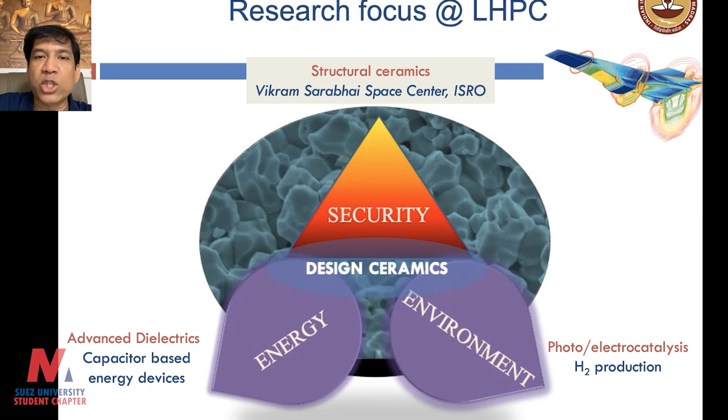The interesting part is that we produce materials in-house and design them from the atomistic scale up to microstructural and macro scale to fine-tune material properties. We use a polymer precursor route for making ceramic materials. It's not very much metallurgy — it's a lot of materials chemistry, but it's very important to have good control on materials chemistry, since producing ceramics through the polymeric precursor route involves a lot of chemistry.

We actually synthesize these polymeric precursors individually and design what kind of ceramics we want at the atomistic scale in the lab. Unlike usual ceramic processing, where you deal with powders, using polymeric precursors and transforming them into ceramics gives us flexibility to cast them and make composites. If you want to make large-scale ceramic matrix composites for space or defense applications, the only way is through the precursor route.

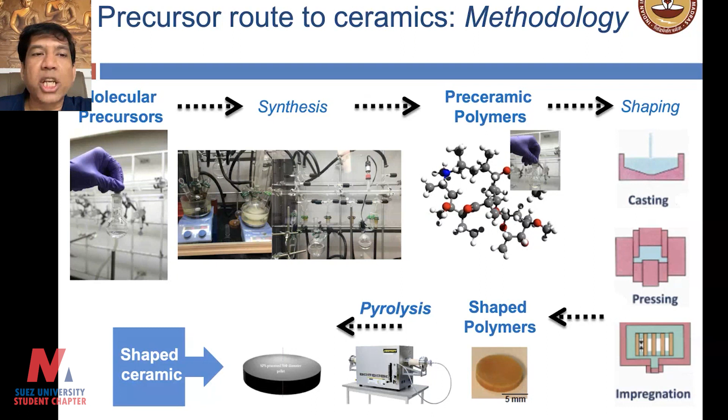When dealing with pre-ceramic polymers, we work with temperatures from room temperature to 400-450 degrees Celsius until we cross-link them. Then, if you want to shape them, you do so in this temperature range. Next, we convert the polymer—depending on its chemistry, the temperature can vary between 600 to 1200 degrees Celsius—into ceramic materials. I hope you're able to see the slides. Then we can produce very stable crystalline ceramics at 1400 to 1600 degrees Celsius.

This is widely interdisciplinary research. The most important thing is that it's a powder-free process, unlike the usual sintering methodologies used by ceramic scientists—completely powder-free. As I said, it involves a lot of materials chemistry, and at the same time it's highly interdisciplinary. To work on this, one should have good control on chemistry.

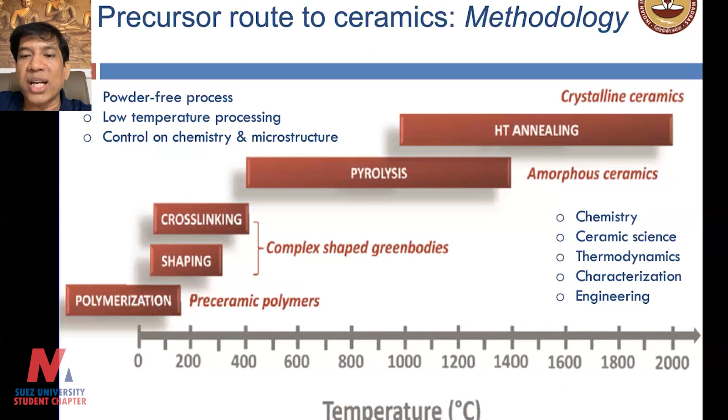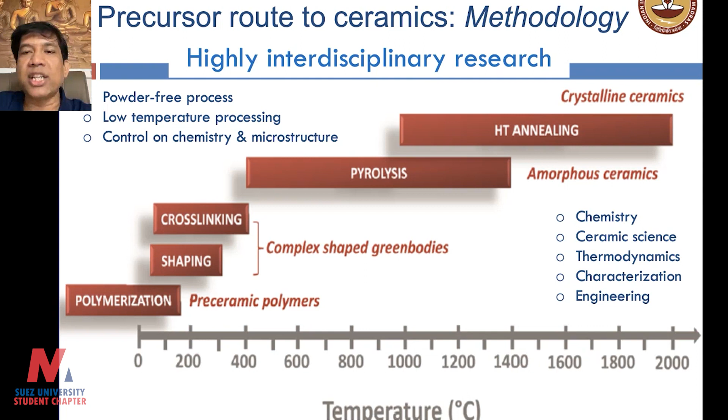You should know ceramic science, you should know thermodynamics, and you should also be an engineer because you need to develop products. This is a very highly interdisciplinary research, not so easy to do in a metallurgy department, because not everybody there is good in chemistry. So in my lab, I hire chemists, engineers, and material scientists to achieve this.

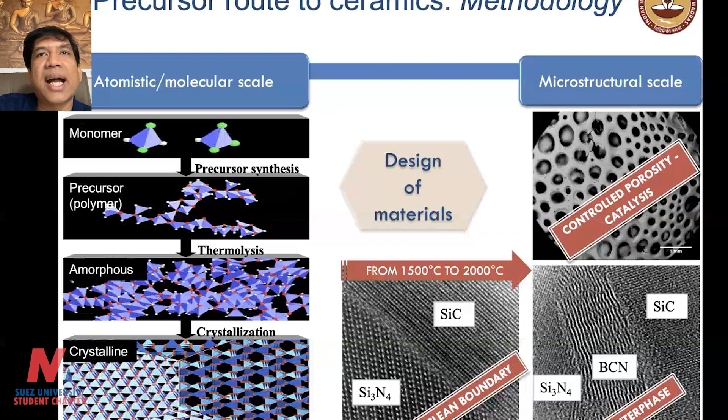For example, SiC means silicon carbide, Si3N4 is silicon nitride. They are already very high temperature resistant beyond 1200 degrees Celsius, but our objective was to work on them to make them stable till 2000 degrees Celsius. This is the work we were doing at the Max Planck Institute in Stuttgart a few years back when I did my PhD there, and we continue to work on this topic because it's extremely important for us, for the country.

There are two important challenges in this area which actually limit our capability in defense and space. One is to make ceramic fibers. Not many people can make ceramic fibers. However, this methodology is known very well - it was published in 1975 by the Japanese scientist Yajima. People know how to make them, and scientific papers are there, but there are a lot of technological challenges, and therefore not many people can make such ceramic fibers.

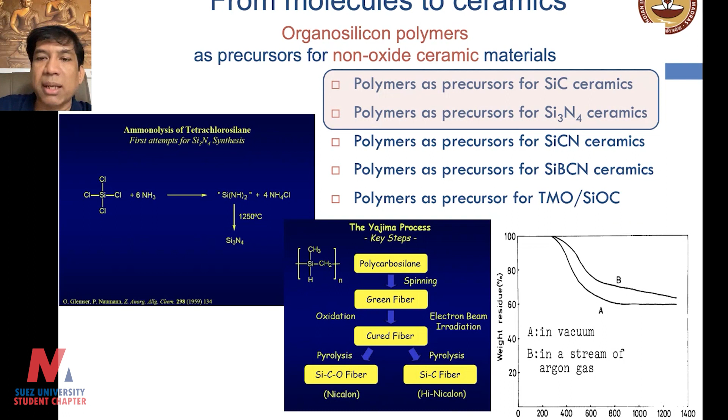For example, to make silicon carbide fiber, you need to produce polycarbosilane precursor, and you should know how to spin it and convert it into silicon carbide fiber. If you're not from the field, the silicon carbide fiber is important as reinforcement in silicon carbide matrices if you want to produce CMCs based on SiC/SiC, which many countries are not able to make as of now because silicon carbide fiber is not available and not many people can make them. As I said, the papers are there, but not many people know how to make it.

Just to give you an idea, if you want to purchase polycarbosilane from the United States, there's a company called Starfire Systems, and they charge like $3,120 per kg to purchase them. There are only a few companies which can make them - for example, Nippon Carbon in Japan, Ube Industries in Japan, Dow Corning in USA, and again COI in USA, and BJS Ceramics in Germany. Only 5 companies can make these kinds of fibers, because they're all patented and technologically very challenging.

If you really want to look at the costs involved to purchase 1 kg of silicon carbide fiber, depending on the quality, it can vary from $2,000 to $12,000. If you really want to buy silicon carbide fibers which can be used for strategic applications in space and defense, it's extremely expensive, like $12,000 per kg.

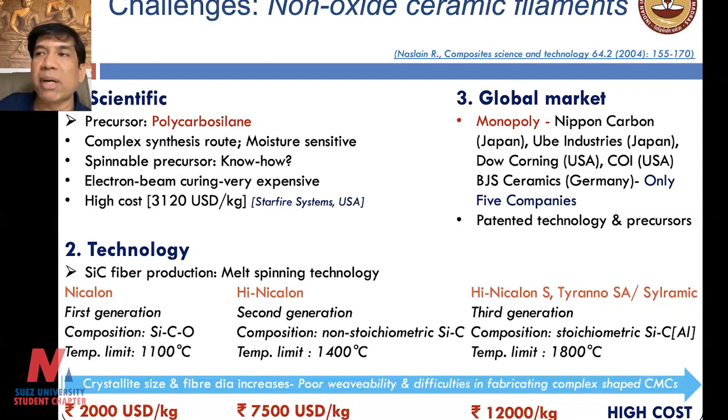But the problem is, even if you have money, I don't think you can get it, because most of them are under embargo. You cannot really get them even if you want to buy them. For example, India cannot purchase them either from Japan or America. So obviously it means that we have to produce them and we have to make them.

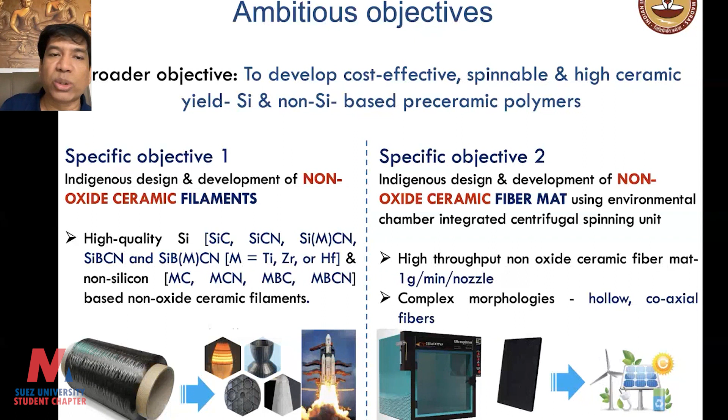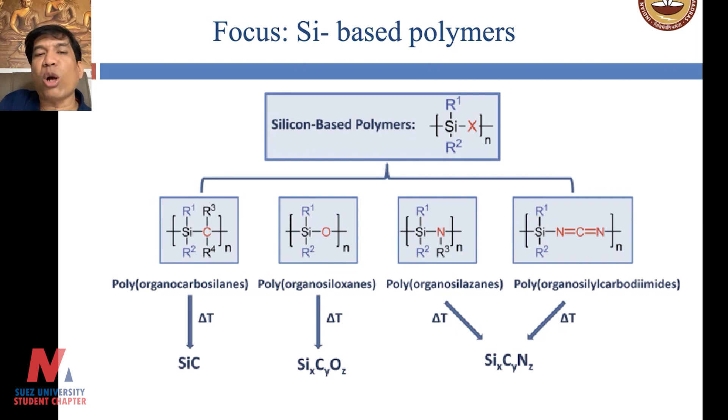Just to give you the chemistry part - I don't know how many of you understand the materials chemistry part - but we have been working on silicon-based precursors, and depending on what goes into the backbone, you can actually make different kinds of materials. For example, if silicon and carbon are in the backbone, you are making silicon carbide. If silicon and nitrogen are in the backbone, then you make silicon carbonitride. If oxygen is in the backbone, then you make silicon oxycarbide. So it gives you a lot of flexibility if you're a very good materials chemist, in making different materials.

For example, we have worked on boron-modified silicon carbonitrides, and these boron-modified silicon carbonitrides are very stable till 2000 degrees Celsius, very ideal for extremely high temperature applications. We have done thermodynamic calculations.

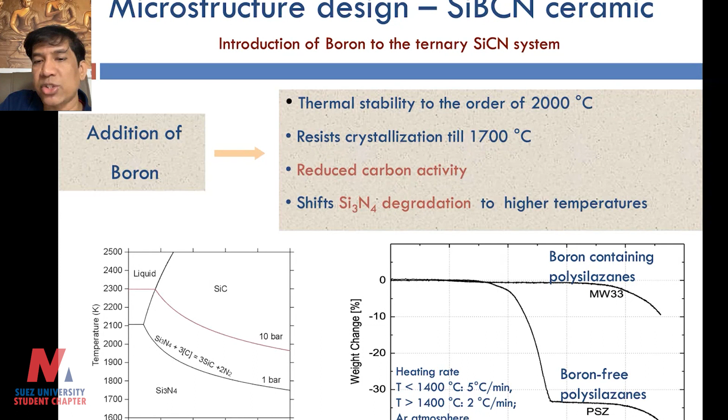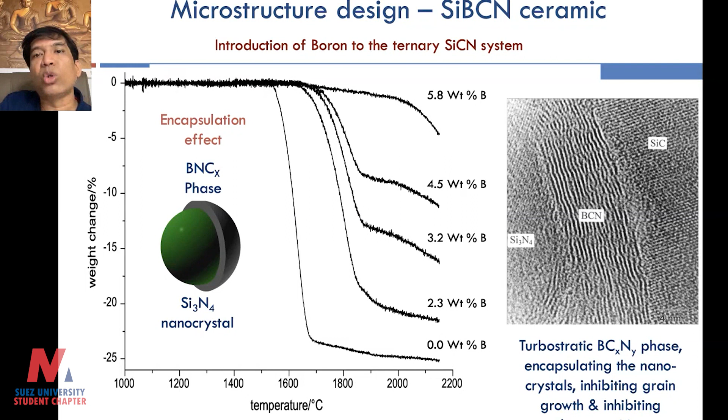We have shown that these materials are extremely stable up to 2000 degrees Celsius. This was work done in collaboration with Germany, where we produced them when I was there, and we have continued to work on them since. These materials are very useful for strategic applications. There are challenges in making these precursors, and one has to take care how to engineer the microstructures to make them extremely stable at 2000 degrees Celsius.

The Indian space program was initiated sometime in the mid-1970s, for our elaborate space program, where we build both space launch vehicles and spacecraft. I think ceramic matrix composites are very much useful for the rocket industry.

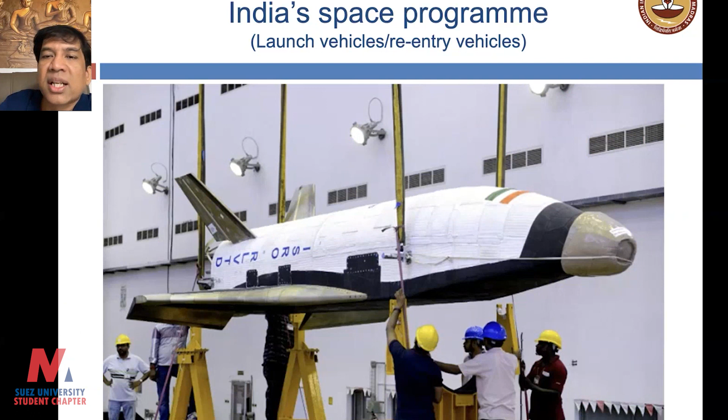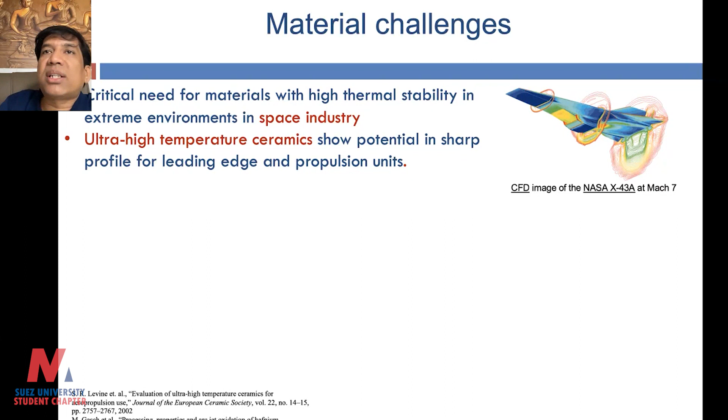This is a reusable launch vehicle that the Indian Space Research Organization is producing and has already tested. For fully reusable rockets, apart from making ceramic matrix composites, we also require ultra high temperature ceramic coatings which can withstand 2000 degrees Celsius, particularly for hypersonic applications. You need to coat very high temperature resistant materials. For coatings, it's again a big challenge.

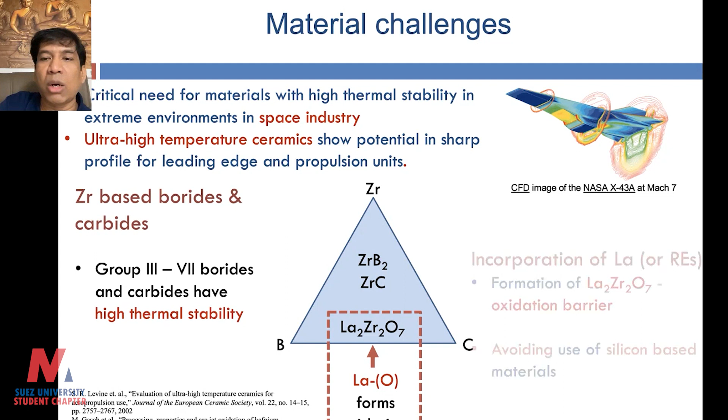So we have been working on non-silicon based materials, as you see here, rare earth based ceramics. The whole challenge is that we don't use ceramics directly. Instead, we make polymeric precursors where, in the backbone of the polymer, we have all the elements required to produce high temperature ceramics like zirconium boride or zirconium carbide. In this specific case, I'm showing borides and carbides of zirconium, but we can also extend it to hafnium carbide, hafnium boride, tantalum carbide, tantalum boride, and so on, all of which have high temperature stability beyond 2500 degrees Celsius.

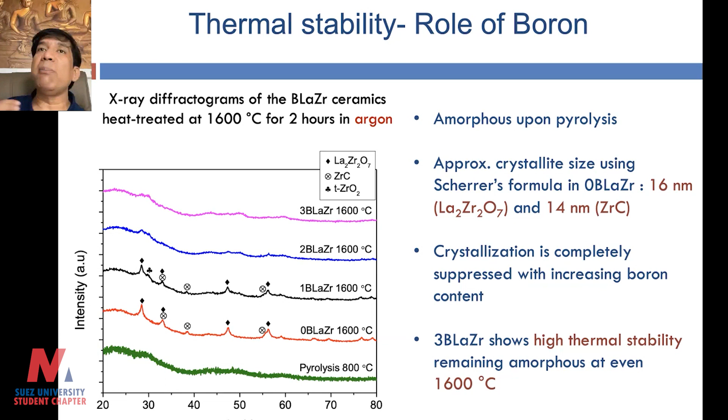We have been working on this for quite some time, for nearly two years, and have done some basic studies. As you can see from the X-ray diffractograms, the first thing we test is their high temperature capability. At 1600 degrees Celsius, the ceramic is completely amorphous, which is good for us, because amorphous materials are more stable. Although thermodynamically not very stable, we make these metastable phases as stable as possible so they can be used for extended durations of time.

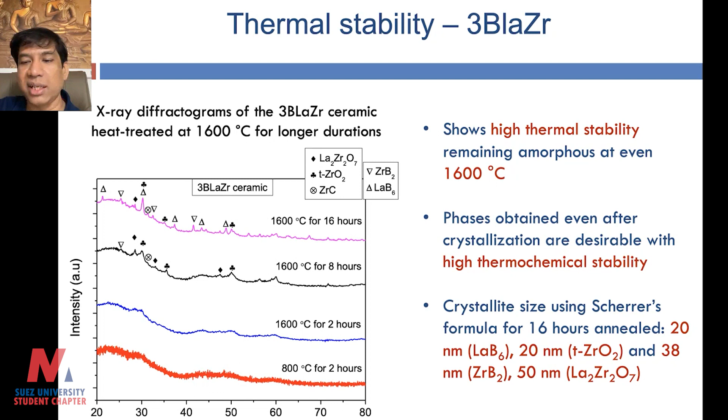For example, here it is shown to exhibit extremely small, fine nanocrystals of lanthanum-based zirconate or zirconium carbide when exposed to 1600 degrees Celsius for about 16 hours. This is what we want, materials which can be very stable. Of course, we could have tested beyond 1600, but we had difficulties going beyond that, because operating furnaces beyond 1800 degrees is also a challenge, so we are restricting our studies to 1600 for now.

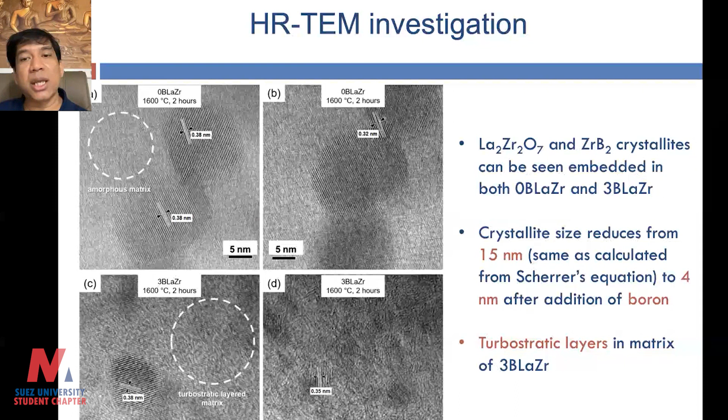So it's a very challenging problem where you want these materials to be stable at very high temperatures, and at the same time, you want them to work for a long time, otherwise the mission will be a failure. Ceramics are always not so easy, and when looking at rocket programs and launch vehicle programs, it's an extremely expensive endeavor, and any failure in the material is very disastrous. So one has to be very careful about that.

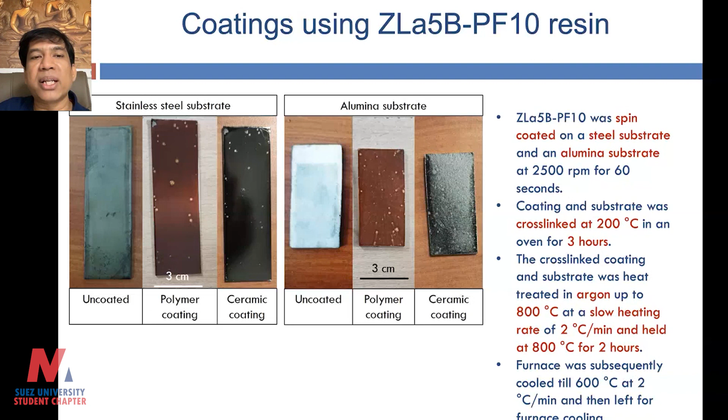We have done some preliminary experiments on making these coatings. You can see an uncoated steel substrate and uncoated alumina, and then we have coated them with polymer and converted it into ceramic, and tested it. I'll just show you a video, it will be nice to see and get an idea.

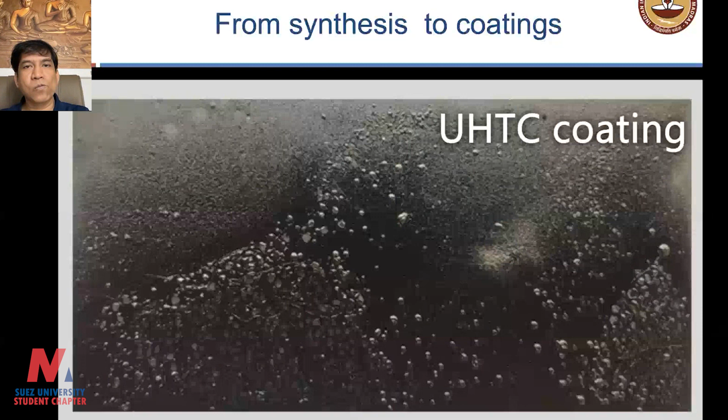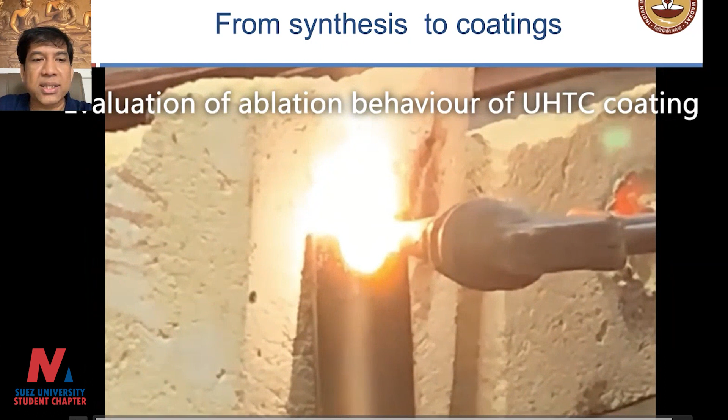This was basically to show you how we can make such coatings from precursor stage to making coatings on steel, metal substrates, as well as ceramic substrates. In order to make them, to be self-reliant and not dependent on any foreign companies, we had to start our own company.

We started a company called Ceratattva Innotech Limited, so that we can be completely independent and make our own precursors. We started this company very recently, just 6 months old, where one of my postdoctoral researchers who had a doctoral degree from Indian Space Research Organization, and his wife, who also had a doctorate from ISRO, came together, along with Raghunath Sharma, a PhD student working with me, and we all joined together and started this company.

You will appreciate that these are new materials, and we need to know their thermodynamic stability. We wanted Professor Hari Kumar on board, because he is an expert in thermodynamic calculations. He uses the calculation of phase diagram tool, CALPHAD, which helps us establish phase stability of these materials, and therefore he was part of this company.

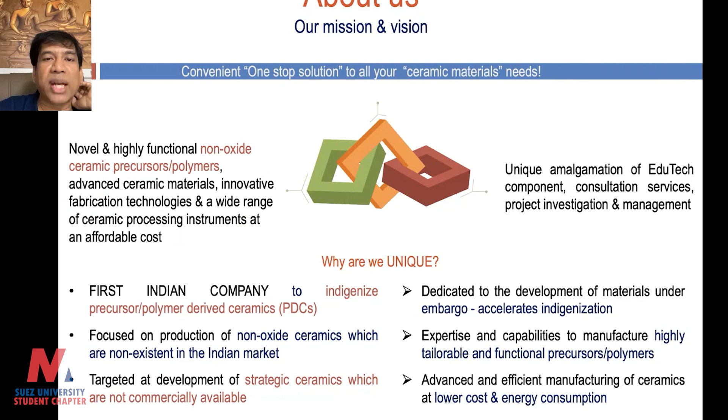Now we are the first company in India which can make such polymeric precursors, which can be used to make ceramic materials for strategic applications. Right now we are interested in catering these materials only to the Indian market, because at this point we do not know whether we will have permission to sell outside this country. But at this moment, we are catering it to the Indian market, particularly to the space and defense industry. Just to give you an idea, this is how the precursors would look like.

If it's a non-oxide precursor, we have to be very careful. They are oxygen sensitive, and you have to make sure they don't get contaminated with oxygen. This is a small piece of boron carbide material that we have developed in the lab for armor applications.

You know that steel armor is very heavy; it's not really the best thing to have steel armors. The defense sector, particularly battle tanks as well as human shields and armors, requires very light and at the same time impact-resistant materials. Boron carbide is an extremely good material which has been tested and proved to be good for such armor applications.

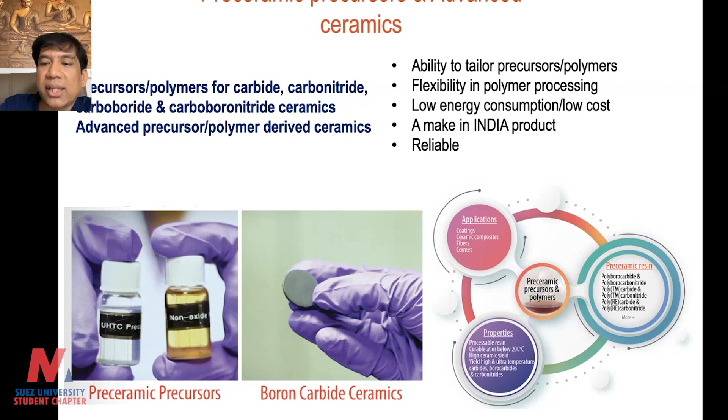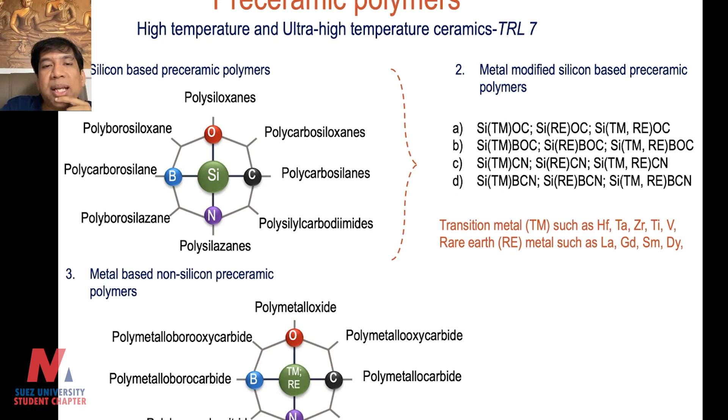This again gives you an idea of different kinds of polymeric precursors that we can produce in the lab. Many of these things are not commercially available in any part of the world, and that gives us a lot of advantage, because we can make these materials and whatever materials we want to make, we are now completely independent. That gives us a lot of advantage in not depending on anybody as far as material development is concerned, simply because they're not commercially available, or they will be under embargo, and India cannot acquire them either from Japan, Europe, or the United States.

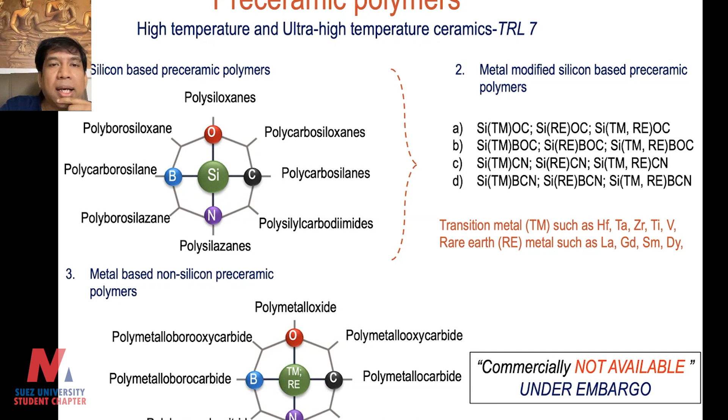So this is what we are right now. In recent times, we have also made our own small ceramic fiber spinning machine for short fibers, and this is one of the first products we have developed, which we have already started to sell. This works on the centrifugal fiber spinning technique, and it challenges the electrospinning technique.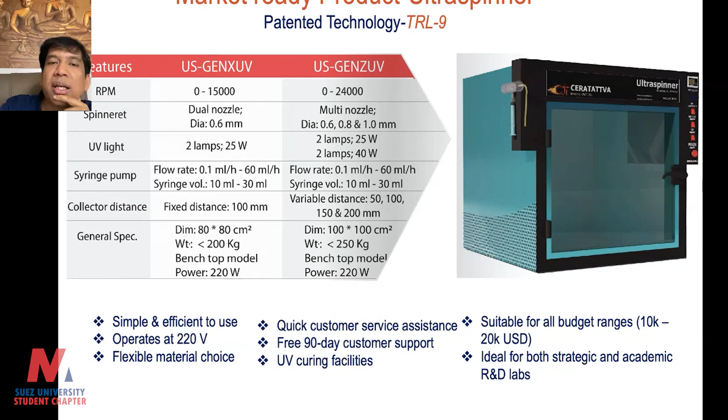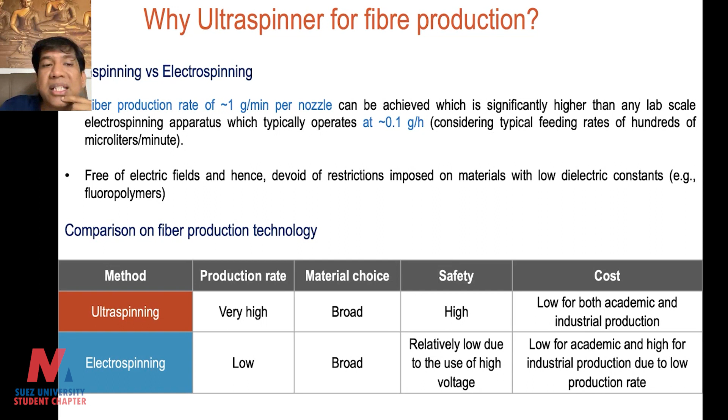I think many of you might have heard of electrospinning technique for making ceramic fibers. But the advantage of centrifugal fiber spinning is that it's extremely fast; you can make a lot of fibers. For example, the production rate is 1 gram per minute per nozzle, compared to electrospinning, which is 0.1 gram per hour. This gives us a lot of advantage in industrialization of ceramic fiber technology.

For example, ceramic—I just want to show you a video.

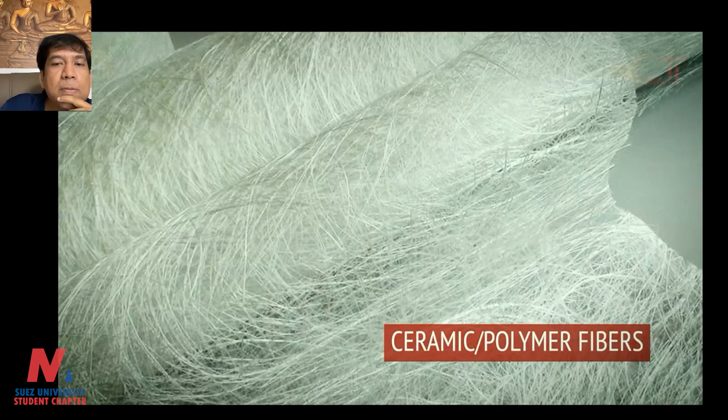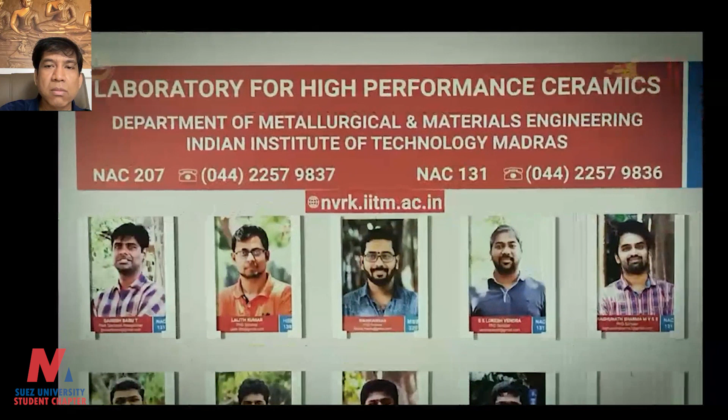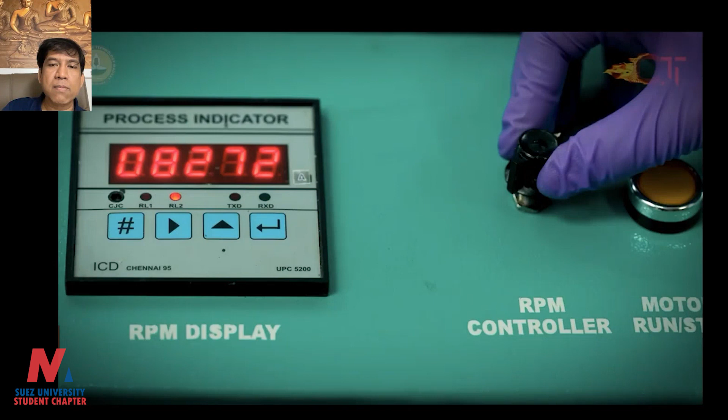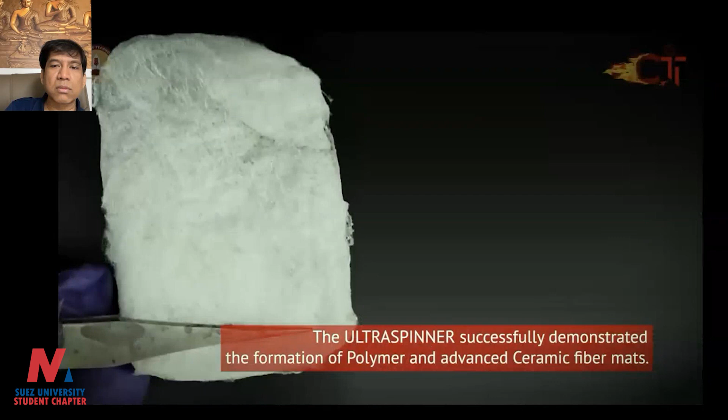Ceramic and polymer fibers form the core of key strategic applications in aerospace, defense, energy, electronics, filters, and textile sectors. The face mask, an essential accessory today, is made with polymer and ceramic nanofibers. Current manufacturing techniques are loaded with disadvantages such as limited material choices, unsafe operating conditions, and poor throughput. IIT Madras, an institute of eminence where innovation meets technology, has now incubated a first-of-its-kind ceramic materials-based startup, Ceratattva Innotech Private Limited, originating from the Laboratory for High-Performance Ceramics in the Department of Metallurgical and Material Engineering. Ceratattva brings into the market a centrifugal spinning unit, the first-generation Ultraspinner with a TRL of 9, that wipes off all problems in existing traditional fiber spinning technologies. Meet the Ultraspinner, India's first commercially available centrifugal spinning unit: 1,000 times higher output than any other technology, user-friendly and high-voltage-free, safe operating conditions, integrated UV curing of fiber mats, clog-free operation, easily tailorable fiber diameter and morphology, producing both polymer and ceramic fiber mats in a matter of minutes. The Ultraspinner also handles advanced functional ceramic oxide fibers and polymer-derived ceramics. The versatile and future-centric design enables extension to other materials too.

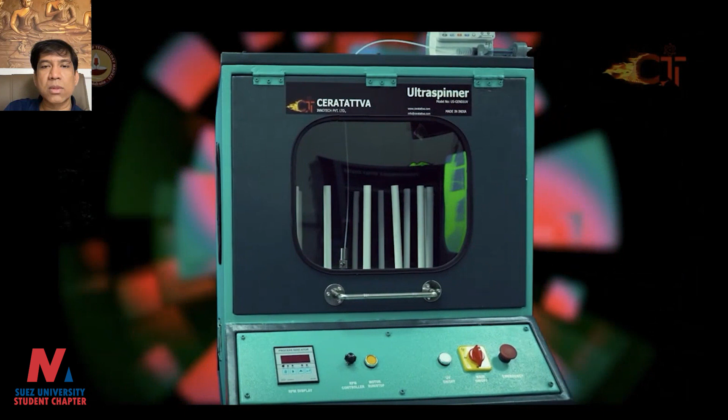The Ultraspinner, the game changer from an IIT Madras research stable, is ready to disrupt the industry of polymer and ceramic fiber manufacturing. With its unique amalgamation of safety and high throughput, it is ideal for both industry and academia alike.

So which means now we can actually make both polymer fibers, fiber mats, including ceramic oxide and non-oxide ceramic fiber mats, and we are now in a commercialized state. So we are already selling it within the country, making them.

Now the biggest challenge is still to make long ceramic fiber filaments, which I initially talked about, like making very long silicon carbide filaments. That is still a big challenge. We have developed a small prototype towards it, and hopefully we succeed, because that's a very important thing for us towards strategic self-reliance.

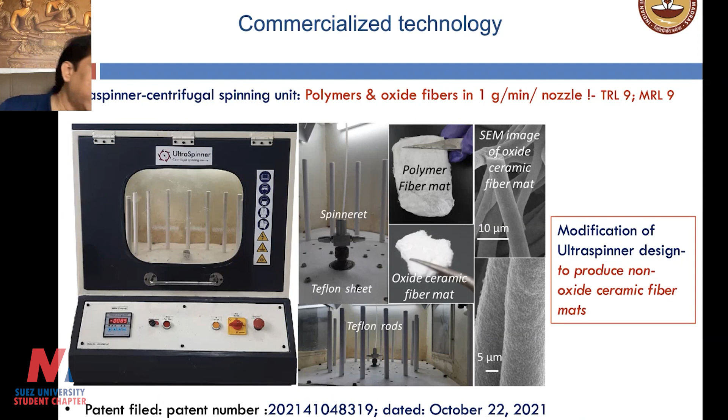So I think I'll stop here. If there are any questions, I would like to take these questions. I think I've just stopped at 25 minutes, but if there are any questions, I would be very happy to take them. If anyone has a question, please use the raise hand button.

I just wanted to say, I assume that a lot of guests here are metallurgists. It's not so easy to make this in a metallurgy department because I'm a metallurgist, and it's not so easy, as I said, because this kind of work requires a lot of expertise in different fields, and it's not easy to get everybody in one single place. On one side, you have materials chemistry. On the other side, you require knowledge in ceramic science. And when you're developing new materials, you require knowledge in thermodynamics to understand what material is stable at what temperature. At the same time, you require engineering skills to translate what you do in the lab to technology. So it's really a big challenge to bring all kinds of people together.

It took me, I joined IIT Madras 15 years back when I came back from Germany, so it took me nearly 15 years to come to this stage, even here in India. So it's a challenging job, but that makes us really go forward with some motivation to do something very interesting. Particularly, the interest becomes more when it is not available to us. Let's say if a particular material is not given to India, that means we are forced to make it inside the country, which is a good thing, because when somebody doesn't give, that gives a lot of motivation for us to make it within the country.